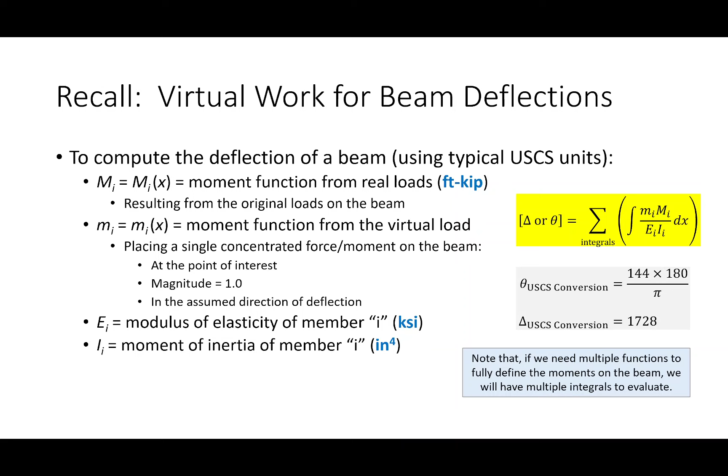But the story for frames is a little bit larger than this, and I want to have a more generalized discussion regarding the method of virtual work. So if we're talking about beams and in this case frames, so far we've only considered the deflections due to flexural effects. What I mean by that is we're only considering how the bending moments affect deformation. But it is possible that the axial loads affect deformation, and it's possible that the shears affect deformation, etc.

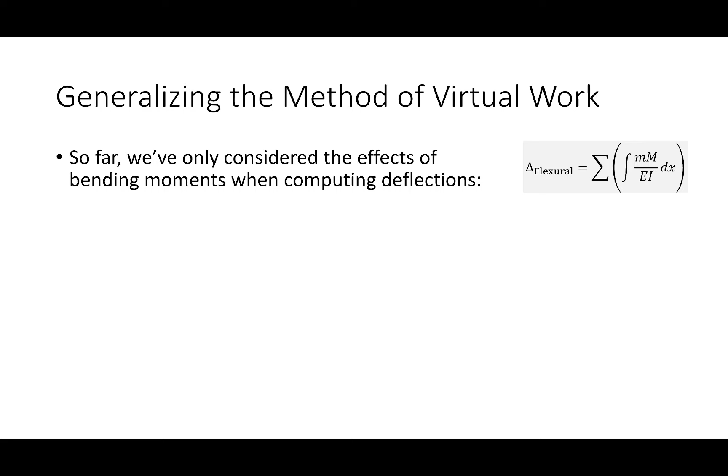And so if you wanted to generalize the expression of virtual work, really it would be this. I know this is kind of nuts here in terms of the size of the formula, but I'd like to sort of break down what we're seeing here. I want to be clear, everybody, I'm not going to expect everybody to do a problem like this in this course, but I just want to sort of take stock of what this is saying.

So let's say, for instance, that I have some sort of structural element in my hand, and I take that element and I stretch it, bend it, shear it, twist it, heat it up, etc. How do I compute the total deformation of point A from beginning to end?

Well, it's however much energy the element is storing in response to the axial loads, however much energy is storing in response to the flexural loads, however much is in response to torsional deformation, etc. If you look at these expressions, they should be pretty familiar.

For instance, remember in Engineering 216, if you had an element you were twisting, the angle of twist is TL over GJ, right? Well, I propose that if you wanted to find deflections using virtual work, just take a little virtual torsion, a real torsion over GJ, and integrate.

Same concept, same idea, I'm just expanding it. What I propose is that the more general expression of virtual work that you can apply to any structural system is this, and all you do is only consider the effects that are relevant to the system at hand.

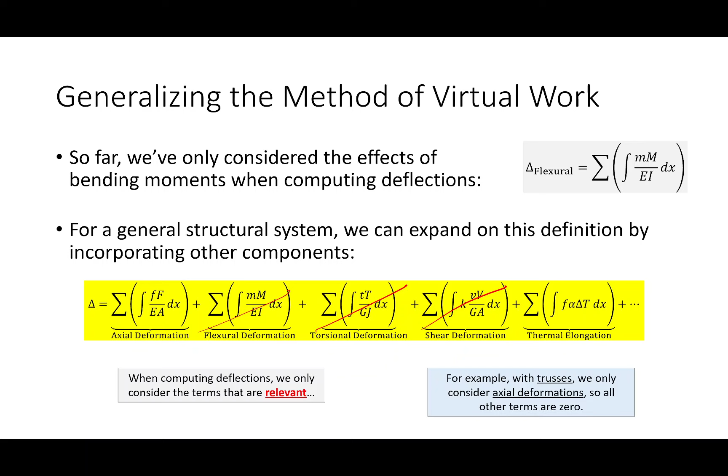We make those assumptions to state that axial forces are really all we need to deal with. We could talk about truss members getting longer or shorter, hotter or colder, but essentially we're able to disregard a lot of the potential impacts. So for trusses, we've only considered axial deformation.

So if we were talking about a frame, if we were looking at frame deflections, and really we could talk about this with beams as well, beams and frames could see bending moments, axial forces, and shears.

Now, for the sake of our discussion here and the problem we're about to do, I'm going to ignore shear deformations, but I'll talk about them a little bit later and where they'd be applicable. They're really not that hard to compute.

If you can write a virtual and real moment function, you can write a virtual and real shear function. If you can do this, you can do that. It's not any more difficult, but I want to have a more relevant discussion as to why you would consider shear deformations. We'll talk about that here in a bit.

Now, how do we do frame deflections? Well, it's the same idea. We do a real structural analysis, we do a virtual structural analysis, we put the load where we're interested in finding deflections, at the point of interest, in the assumed direction with a magnitude of 1, and write our functions.

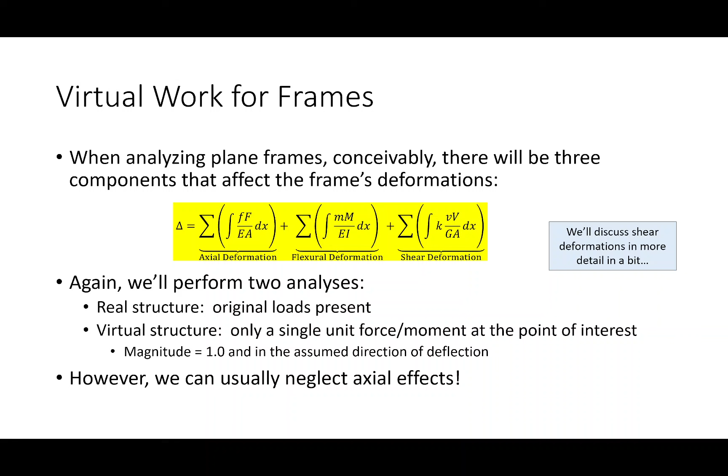Now, in the case of the frame we're about to do, we are going to consider axial deformation and flexural deformation. But I propose that for frames, you can neglect axial effects. I'm going to explain that with this example.

So this is going to be the main star of the show today. We're going to compute the deflection at point A, the vertical deflection, using virtual work. Now I'm giving you the real structure. We're going to consider flexural deformations, and we're going to consider axial and flexural deformations.

So for this problem, we're going to need big M, big F, little m, little f. We're going to need both for the entire problem. So we're going to sort of do both, but you're going to see something that happens as we get to the very end.

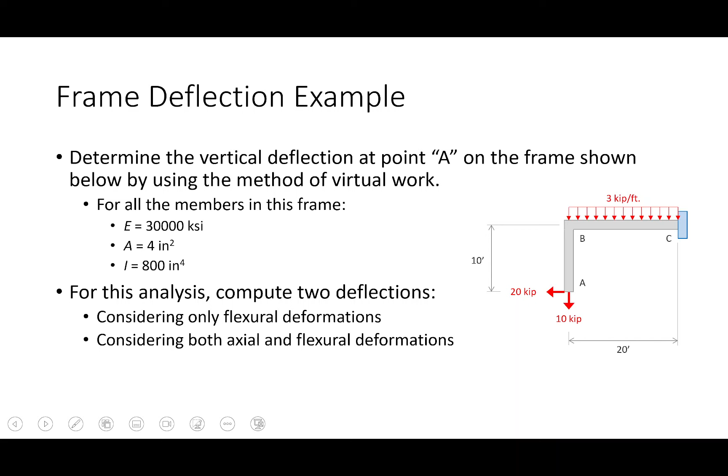Now, the one thing I do want to say about this problem is I want to discuss something I haven't really gone into, I've just sort of taken it at face value: these properties right here. So I'm giving you a Young's modulus of 30,000 KSI, an area of 4 square inches, and an I value of 800 inches to the 4th.

What I want to just say right at the onset before we do this problem is when it comes to the A value and the I value, the A is the cross-sectional area.

If I were to slice through the section, that's how many square inches of area there is. And the 800 inches to the 4th, that's the moment of inertia. Like if you remember from a rectangle, BH cubed over 12, remember that?

What I'll say about this cross-section is these values are a little bit unrealistic on purpose. For this area, this is a really, really big moment of inertia. What I'm saying is this frame, these members, are really flimsy axially. They have a really, really small area, okay?

And so think that through. If the area is really small, they should stretch a lot axially, like along their axis. They should be like a rubber band, like taffy, okay? But when we see how the numbers play out, you'll get what I'm talking about, and how in most frame problems we can neglect axial deformations. The best way of explaining it is to just do the problem, okay?

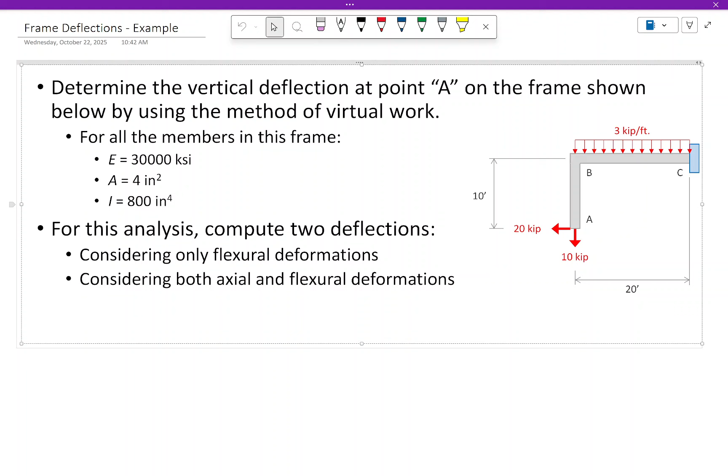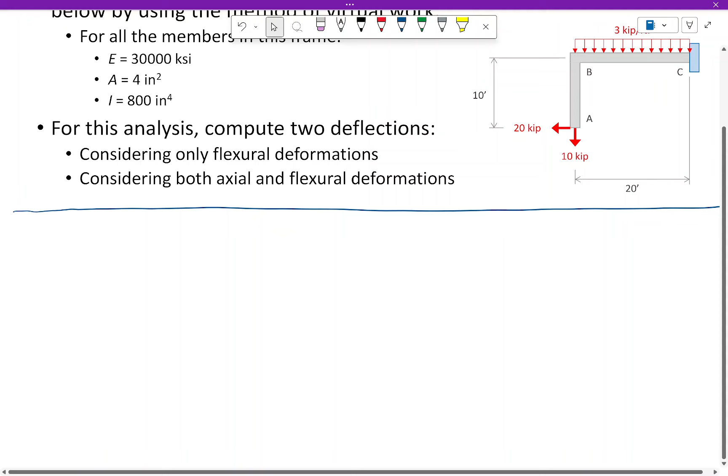All right, so, okay. So here's the structure. What I'm going to do is redraw this structure, and I'm going to do it on two sides.

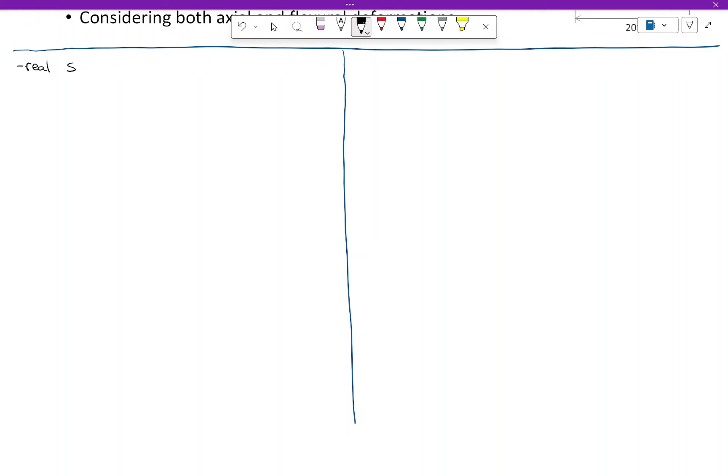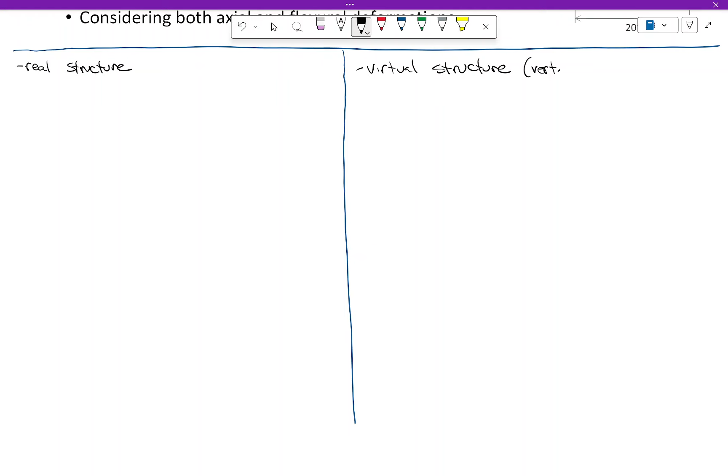So we're only going to do a vertical deflection. So the real structure and the virtual structure. So the real structure and the virtual structure, right? The real structure is going to look like this.

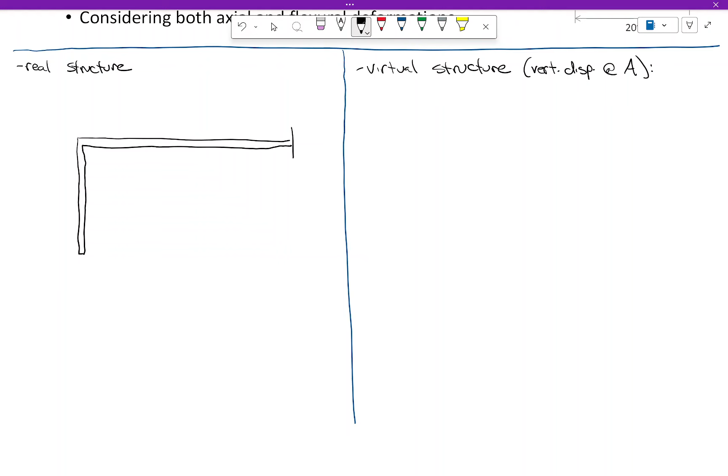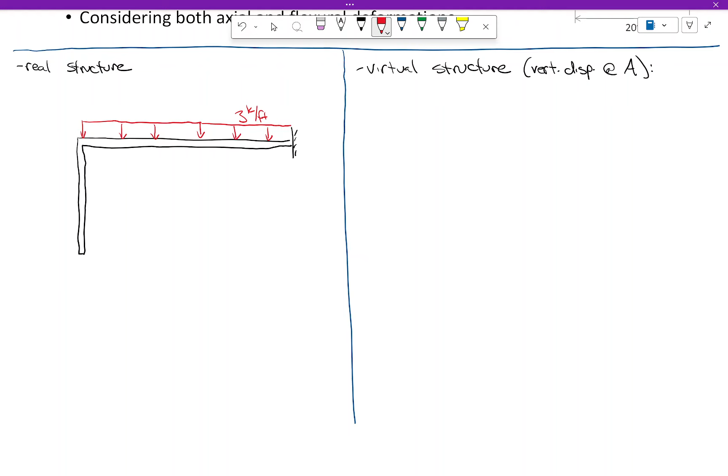Okay, we have a distributed load of 3 kips per foot. We were given a horizontal load of 20 kips, a vertical load of 10 kips.

Okay, let me ask you a question. Would you trust me if I just told you what the reactions are at this fixed support? Would you believe me if I said that the vertical reaction was 70 kips, the horizontal reaction was 20 kips, and the moment reaction was 600 foot kips? And by the way, in terms of dimensions, this is 10 foot, this is 20 foot. Let me label this. This is A, B, C.

Okay, would you all agree with that? Is that okay? You've got 20 to the left, so you've got to have 20 right. You've got 10 down, 3 times 20 is 60 down, so 70 down, you've got to have 70 up, etc. Is that okay? Okay, that's the real structure.

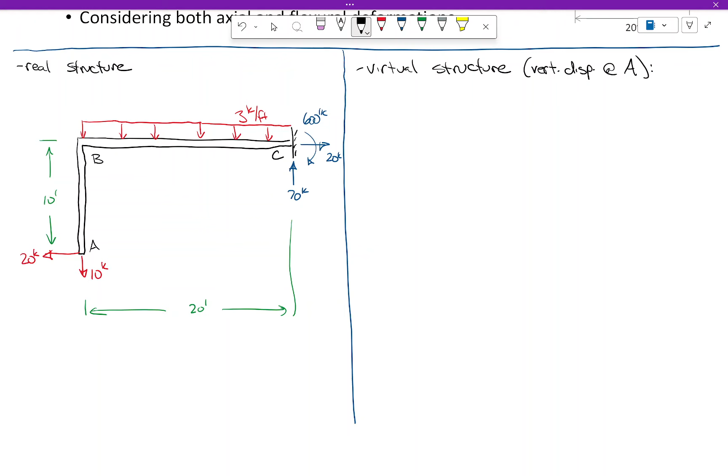The virtual structure is going to look like this. It's going to be very much the same frame, well, exactly the same frame, just no loads present on it. I've got a virtual load. I'm going to assume it deflects downward. I think that kind of makes sense, that it's going to go downward. This is A, B, C, 10 foot.

Actually, let me put that down here. All right, and then for my reactions: 1, and this is a moment reaction, and it ends up being 20, well, 20 foot, if we're being precise. So these are the two structures I'm going to have to analyze, the real structure over here, the virtual structure over here. Is everybody okay with that?

Okay, now here's what I'm going to do. I have two members, member AB and member BC, okay? So what I'm going to do is define a coordinate system for member AB. We'll call this X1, Y1. So in other words, the X-axis along the member, the Y-axis like that. So if I do that, I'm going to put the same coordinate system over here.

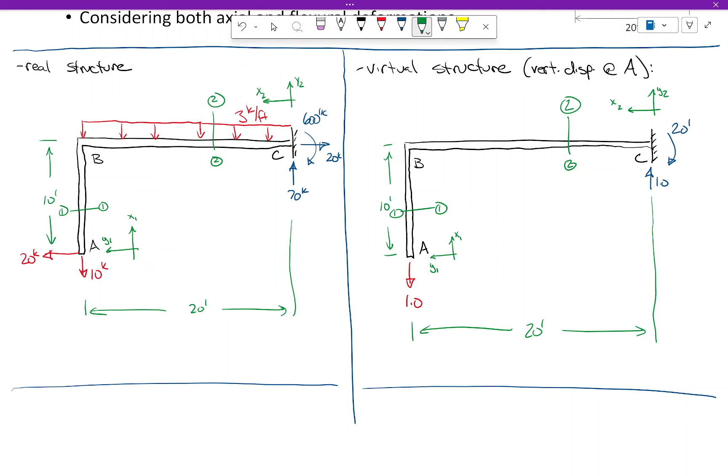So if I look at section 1-1 looking down, what do I have? I just have this. Section 2-2 looking to the right, I just have that. So let's see what they look like.

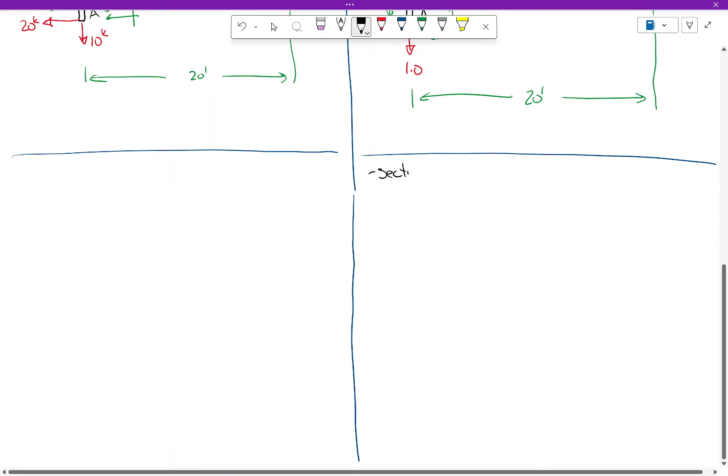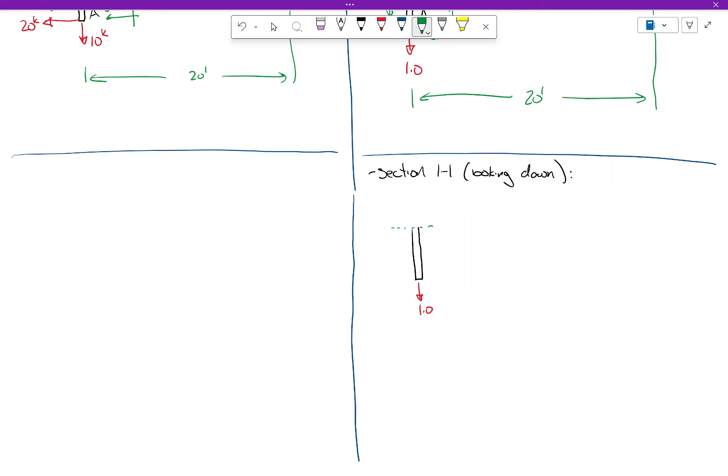Okay, so section 1-1 looking down is going to be like this. It's going to be like that. I've got 1.0 going down. I cut a section at some arbitrary distance, which we'll call x1. Okay, and so this is point A.

What are the unknowns here? Do I have any unknown horizontal forces right here? Like if I sum forces in the x direction, what's the horizontal force right here? Zero, right? I do have a vertical force.

I am going to have that. How much is the vertical force going to be? How much is that going to be? One. Okay, so we'll put that here.

How much is the moment going to be? How much moment is present in this member? It's not a trick question, by the way. If I have a member and I'm yanking on it, is there any moment present? No, so the moment is zero.

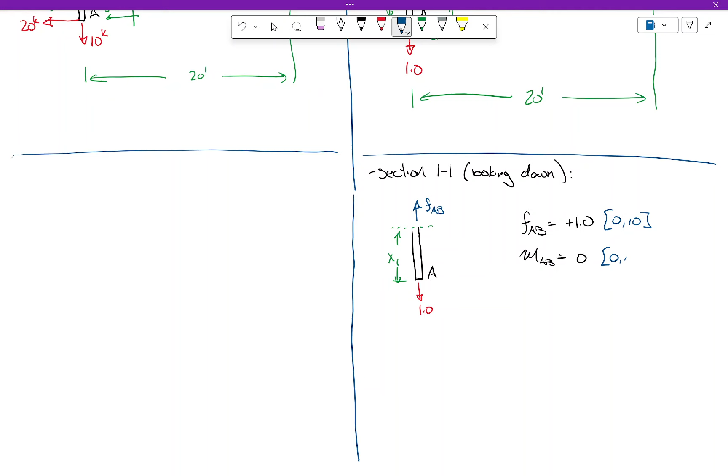So what I'll say is FAB is 1, MAB is 0. Those are from 0 to 10. Does everybody see why they're from 0 to 10? Everybody understand that? Because the member's 10 foot long?

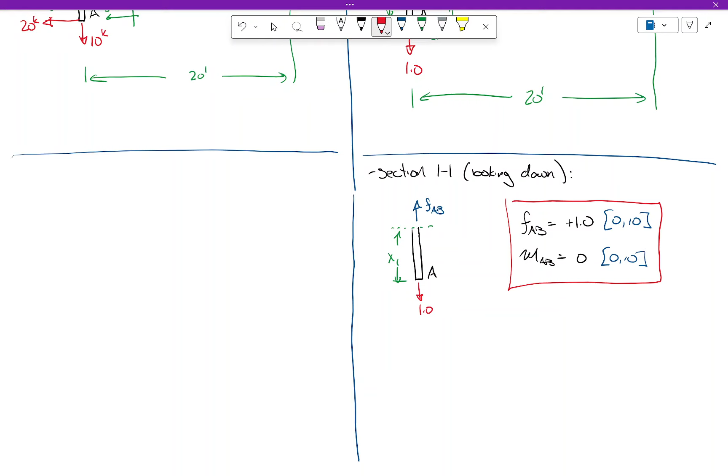So far, so good? All right. So let's see if we can come up with something similar. Okay, so FAB, MAB for the real structure. Let's do the real structure.

Okay, so what does the real structure look like if I cut a section and look down? I really came close to using the Expo marker on my surface just now. I really almost did. That would have been funny. Well, in retrospect, right now it would have been a little frustrating. Okay, so here's the structure.

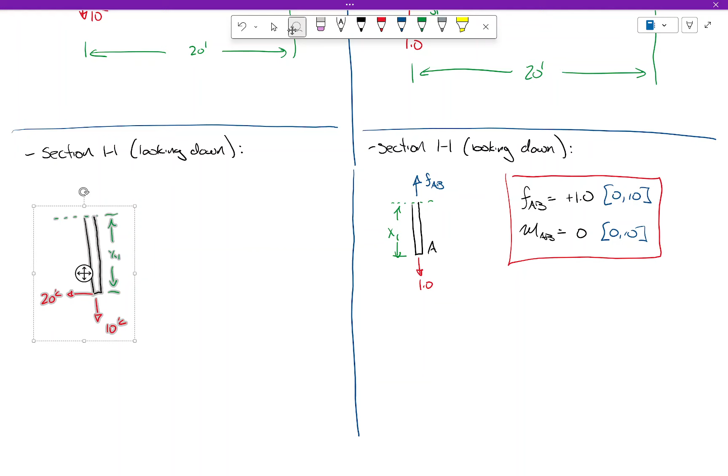I have 20 kips, 10 kips. This is X1. So what I need is an FAB and an MAB.

Let's reason through this. Let's start off with FAB. How much is FAB? How much is the axial force along the force of the member? Is the member experiencing tension or compression? Tension. And how much? 10 kips. Okay, so this is plus 10 from 0 to 10.

So in other words, there is this. Now, I propose there is a moment present. So we'll call this plus 10 for the axial force. Does anybody know how much the moment is?

20x1. That is correct. That is not what I'm going to write down. What I'm going to write down is from 0 to 10. Why am I doing that?

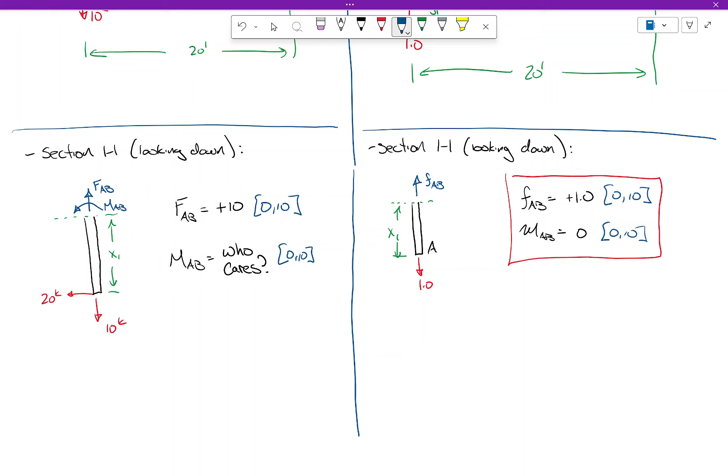Have you ever had an engineering professor write a formula that says, who cares? Well, there you go. First time for everything, right?

Does it make sense why I did the virtual structure first? Because recognizing that this is 0 meant I didn't have to do this work. This seemed like an easier structure to deal with first, so I said let's go ahead and do this first. One thing you might notice on your homework due at midnight is that there are certain regions, on the virtual structure, where the moment is 0. So why take the effort to derive the real function, when you're ultimately multiplying it by 0? Does that make sense? Something to think about.

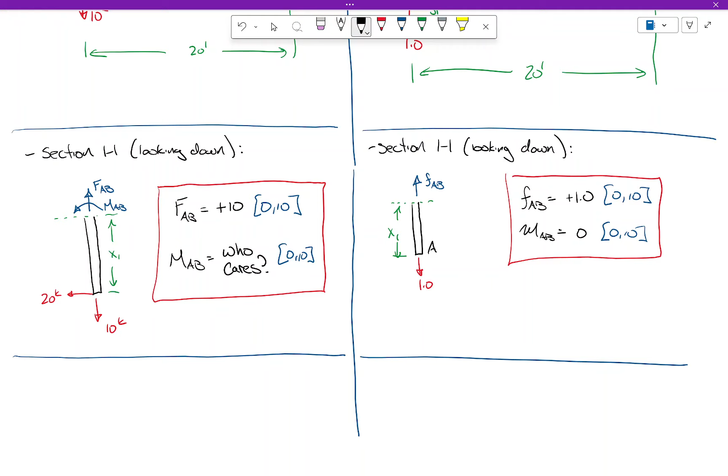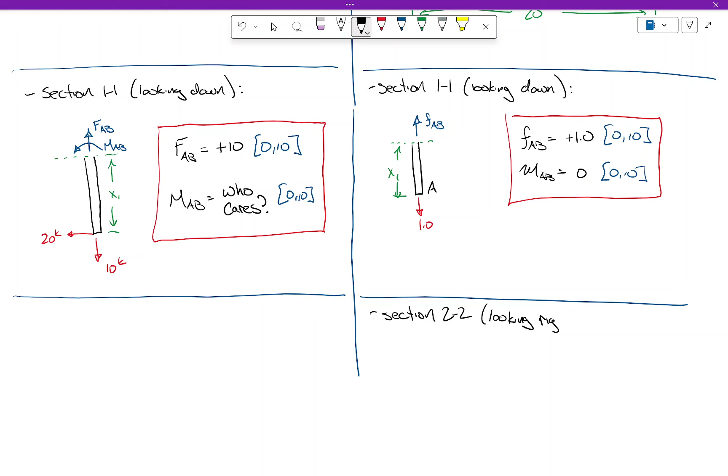Okay, let's do section 2-2, and I'm going to do the virtual structure first. Now I'm going to look to the right. Let's just refresh: what does the virtual structure look like? If I'm cutting a section and looking this way, I'm going to see this force and that moment.

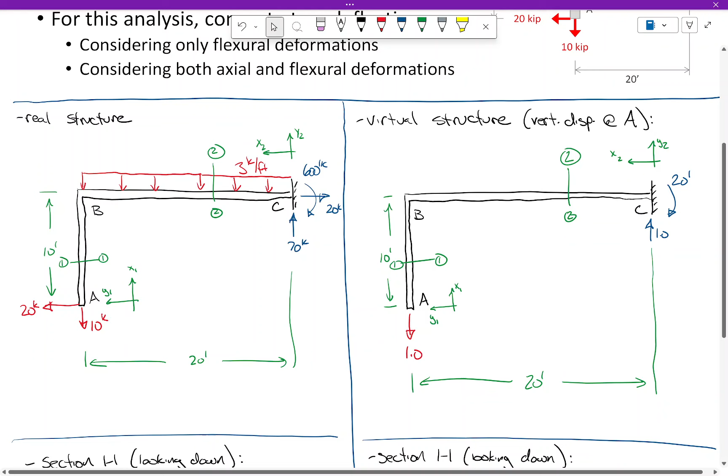Let me have a little reference here on the board. I'm going to have FBC equals something, MBC equals something, and they're going to be valid from 0 to 20. Let's see if I can fill that in.

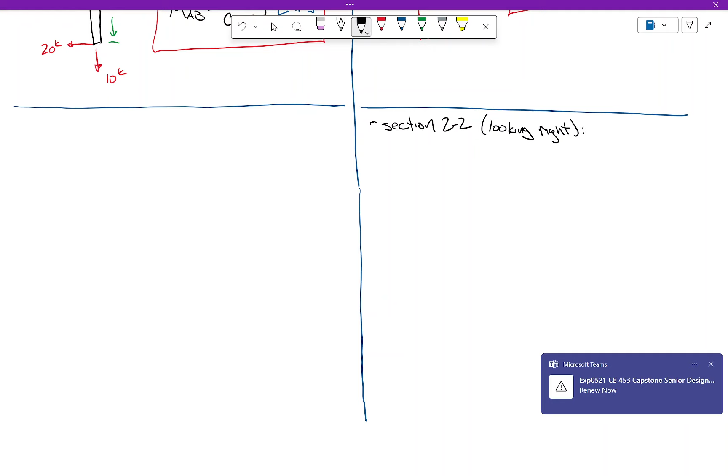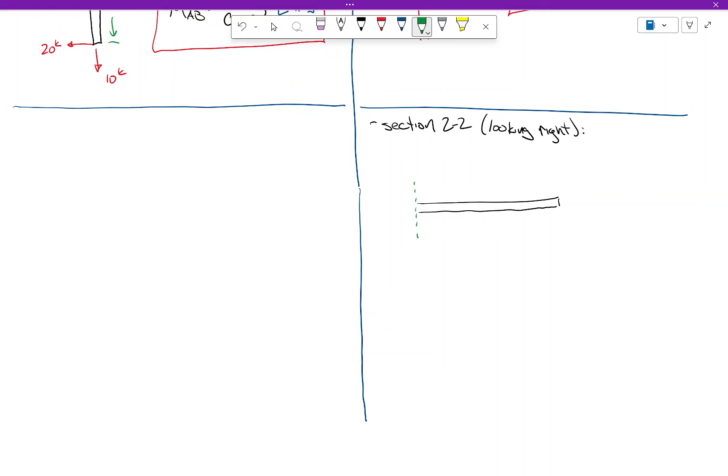So we've got my structure like this. Here's my section cut right there. I have a reaction of 10, a moment of 20 feet. This is point C. This distance, we're going to call X, or X2 in this case.

Let's start off with unknowns. Is there any unknown in the X direction? There's no unknowns in the X direction. So what is FBC? Along the axis - remember, little f is along the axis of the member. This is the stretching force, either stretching or squishing along the axis. This is going to be 0.

Does that make sense? So before we do anything, what can you tell me about over here? What's going to happen over here? Doesn't matter - FBC doesn't matter. We already know, we don't have to worry about that. We do need to get an MBC, though, for both sides. We are going to need to do that, and that's going to take a little bit of work.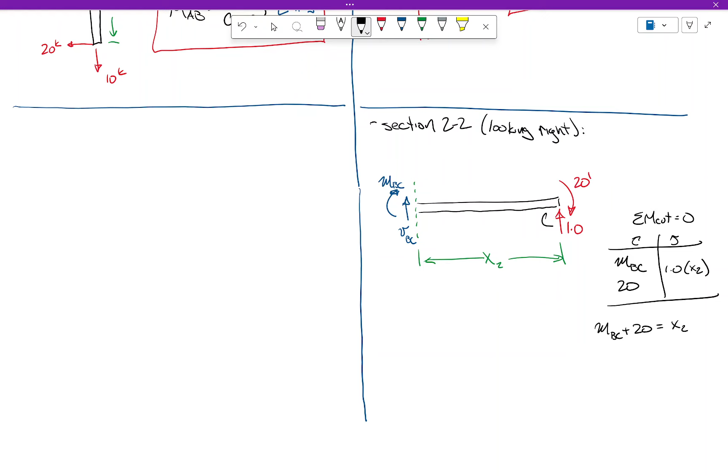I'm going to have MBC going like that, 20 going like that, 1 times X2 going like that. Is that okay? Does that make sense?

Yes, I have a question about the little VBC - why is that not, like, 1 going down? So, oh, you're talking about this. Okay, that's a great question, let's talk about that.

Okay, so if you cut a section in general here, and look to the left, this is positive shear, this is positive moment. If you cut a section and look to the right, positive shear, positive moment. So to answer your question, here's what I would say: if we were summing forces in the y direction, that is negative - it is going down, right? But when you're deriving expressions for shear and moment, you automatically use this sign convention: if you cut a section, look that way.

So we're cutting a section looking to the right, up and over. If we were summing forces in the y direction, we would get VBC equals minus 1.0, and we would get that. Does that make sense?

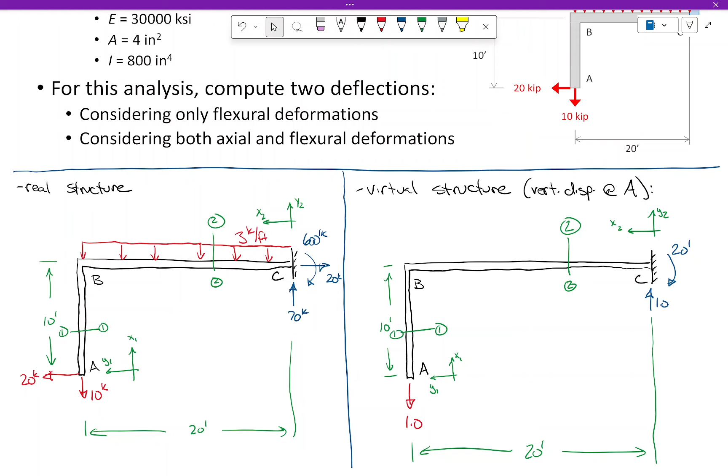Does anybody notice how this fails the derivative test? If I take the derivative of this, what do I get? I get 1, right? But this is minus 1. Why is the sign flipped? The reason the sign's flipped is because the axis is going that way. The axis is flipped, so the sign's going to be off. So that was good stuff.

So this is x2 minus 20. How do you do 0 to 20? Oh, yes, you're right. Thank you. Zero to 20, yes that's right. 0 to 20, 0 to 20. Everybody with me on this?

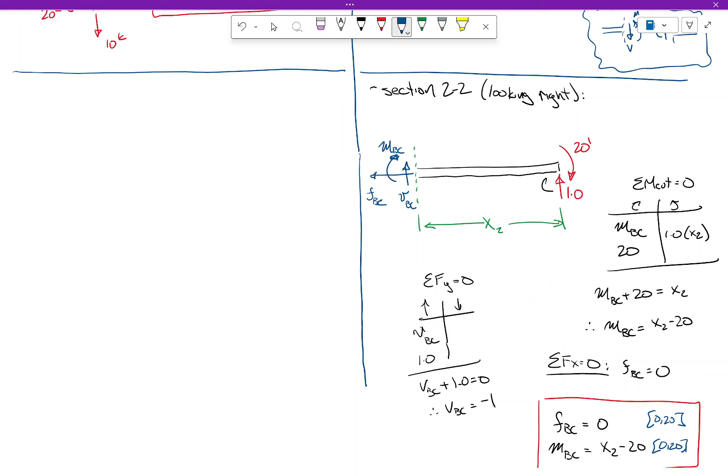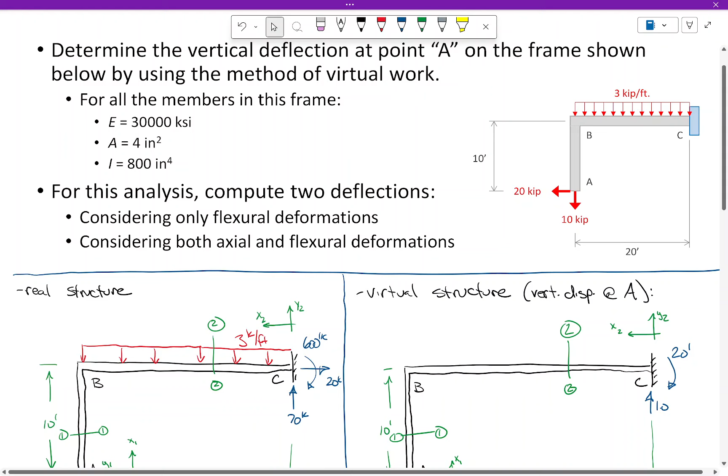All right, so the only thing we have left to do is section 2-2 on the real structure. A little bit more going on with this one. Because we've got to account for all this, we cut a section looking to the right. We have all this we have to deal with. So just a little bit more.

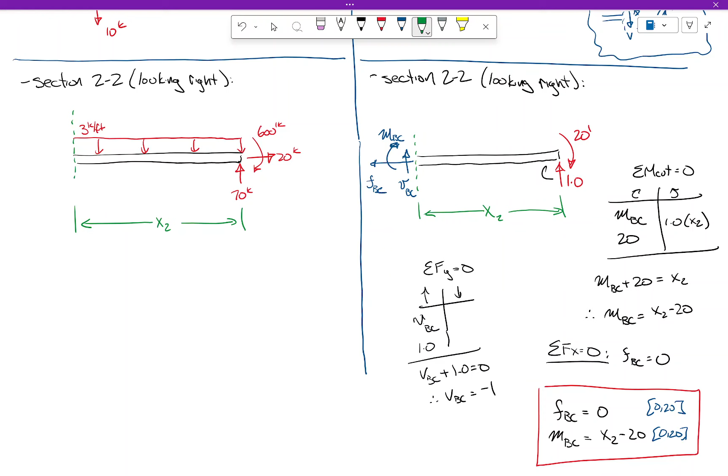So we have a 70 kip, we have a 20 kip, 600-foot kip, 3 kip per foot load. There's the section. X2. So what are my unknowns there at the end? I'm going to have an F, an axial force, an unknown shear, and a moment. Now we've already decided that FBC we don't care about because we're ultimately multiplying it times 0. Does that make sense? Everybody okay with that?

So what do we do with all this? Well, what we do is we collapse this into a point load, moment arm right here, and then we sum moments at the cut. When we sum moments at the cut, I don't need to consider that and that because they're going right through it. I'm going to have an MBC on this side, 3x times x over 2, and I've got to deal with that 600. And that's going to be opposed by the 70 on that side. Unfortunately, this equation is just going to be a little messy, not really anything I can do about it. So MBC plus 1.5x squared plus 600 equals 70x2.

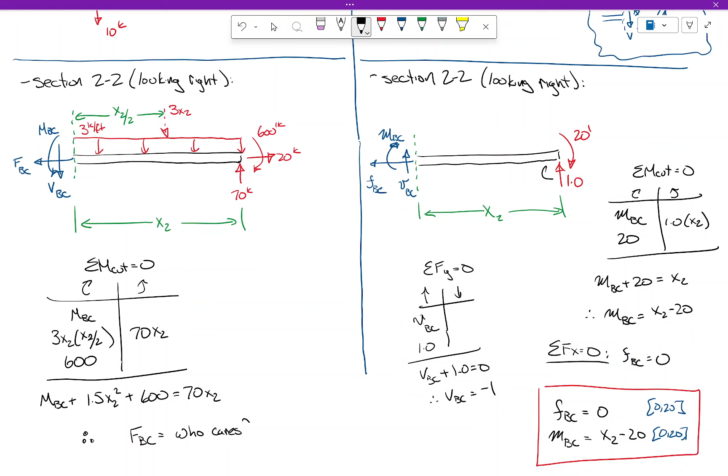So therefore, what do we have? We have FBC is who cares? And we have MBC is 70x2 minus 1.5x2 squared minus 600. Both of these from 0 to 20.

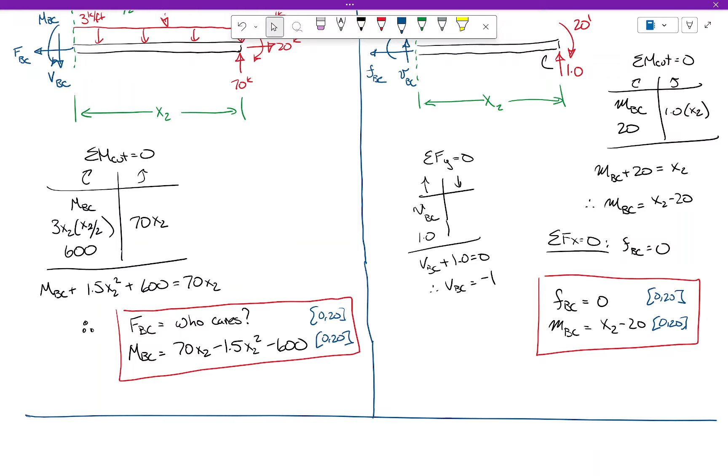Yes, sorry, why is it my moments are flipped? Is it because of the axis? For MBC, I have it on the other side of the table. Oh, that's because I made a boo-boo. That's my fault. I needed to draw it like that. I made a boo-boo, that was a whoopsie. It needed to be drawn up, that's the positive sign convention. It needed to match. Well, would the point load moment be opposing the 600? It is, that's why I have the 600 this side, the 70 this side. Oh, never mind, okay, yep. Yeah, that error, that's my fault.

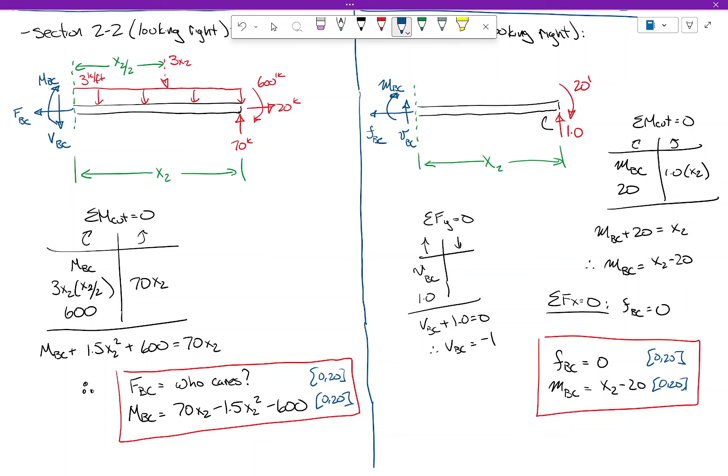Does that make sense? Yes, why can't we just look left for that one? So if we looked left, we would have to consider all of this. We can, no reason not to, we would just have to consider all that. We can't just say there's nothing going on here. There is. It's a great question, but it's an easy mistake to make because there's nothing going on inside the joint right here. Good question, sound good?

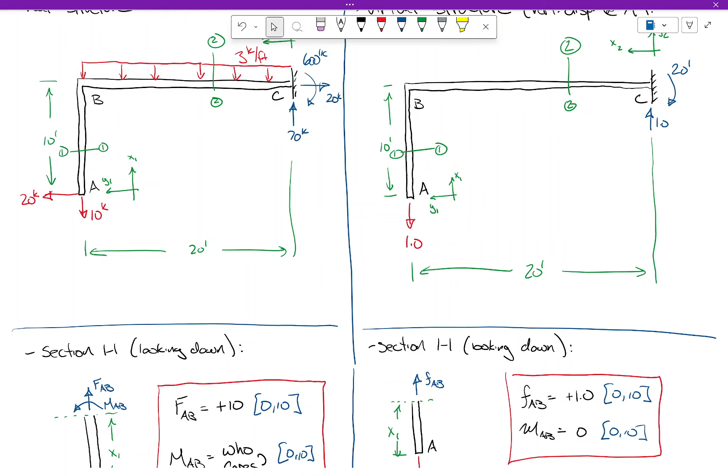All right, once you get to this point, the problem should be pretty easy, and let me show you what I mean. And this is really where axial deformations can be ignored. So let's start off with this, let's just recall

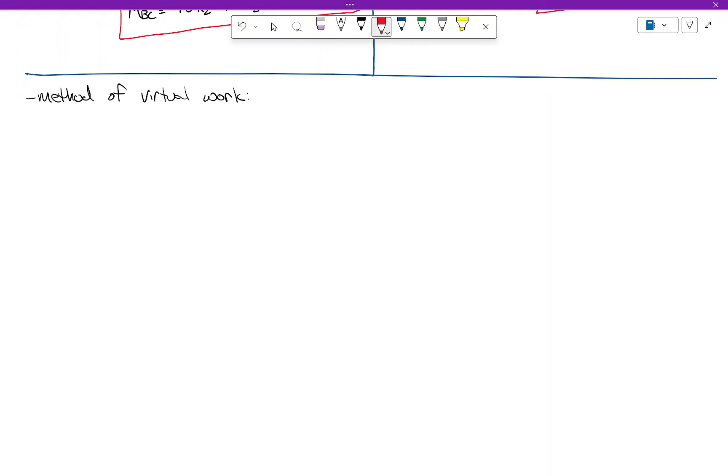Those are our properties for this problem, right? It's 30,000, 4, and 800. So the way that I'm going to organize this is I'm going to do the flexural deformations first, then the axial deformations.

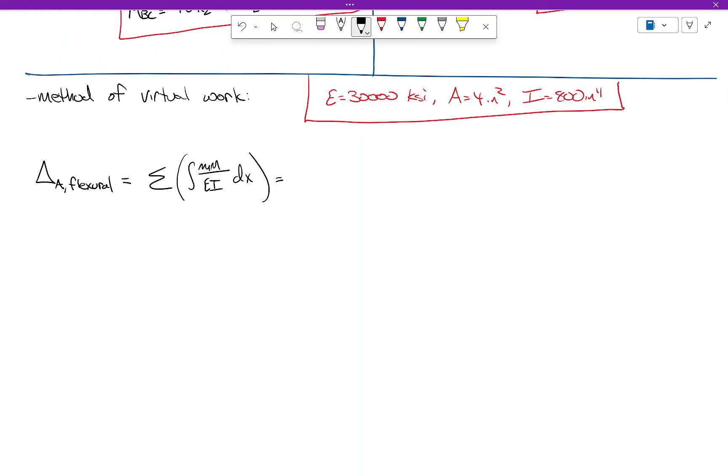So the flexural deformations are going to be summing up these integrals. We're going to be summing up these. Now, how many of them are we going to have? We're going to have technically 2 of them, but so how do we handle that? Well, the first thing I'm going to do is the E and I is constant for the whole thing, and this is a deflection. So I'm going to say 1728 over EI times some integrals. And what are those integrals?

We're going to have an integral from 0 to 10 of this, plus an integral from 0 to 20 of this. But by the way, what can we do with the first integral? Goes to 0 because that's what we've got. And we know that one's 0, so we don't even have to worry about it. So all we have is 1728 over EI times an integral from 0 to 20 of x minus 20, and 70x minus 1.5 x squared minus 600 dx2.

So let's just sort of digest what's going on here. This is just a regular old calculus problem at this point, right? This is something you can plug into your Casio FX115ES Plus, integrate from 0 to 20, or break out the old Wolfram Alpha. I know college students use that every now and then. So integrate from 0 to 20, multiply by 1728, divide by EI. Are you okay if I just told you what the number was when you do that? Okay, so when you do that, you get plus 3.36. So therefore, if we calculated the deflection at A and all we used were the moments, we would get 3.36 inches down. Does that make sense?

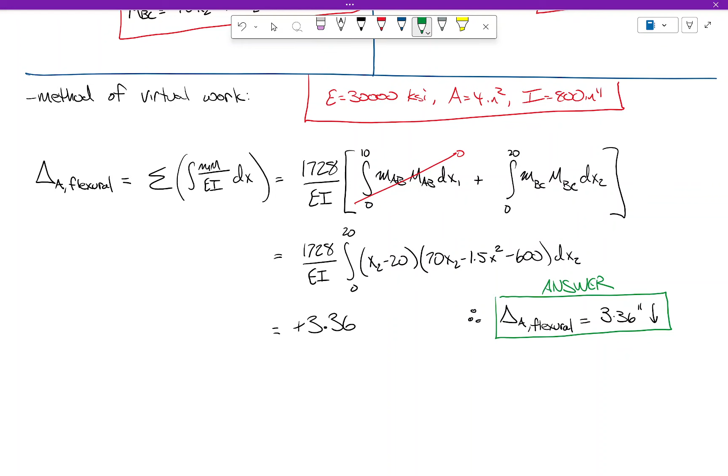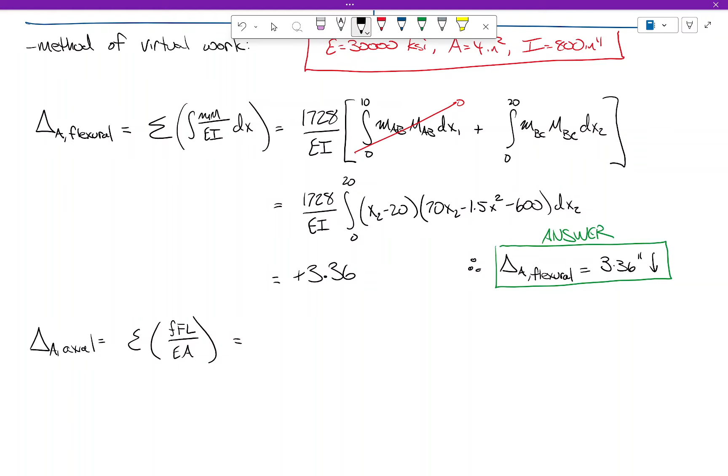How are we doing on that? Okay. Now, for the axial deformations, what I'm going to do is do a truss problem. Remember how we calculate deflections using for trusses? Little f, big F, L over EA. Remember that? So what do we got? We've got little f, AB. Here, let's do it like this. The 1 over EA, that's consistent. So we have little f, big F, L, plus little f, big F, L.

But does anybody see something that's going to cancel, or get eliminated? The second one, right? That's going to be 0. So all we've got is, which is, I mean, what do we have? We have 1.0, 10 kips. Remember, AB is 10 feet long, 30,000, and then 4 square inches. Remind me, when we calculated truss deflections, what did we have to do to the member lengths? We had to convert them to inches, right? Y'all remember that when we did virtual work for trusses? We had to take the truss lengths and convert them to inches. So we got to throw a 12 in there. What do we get when we calculate this? We get a value of 0.01.

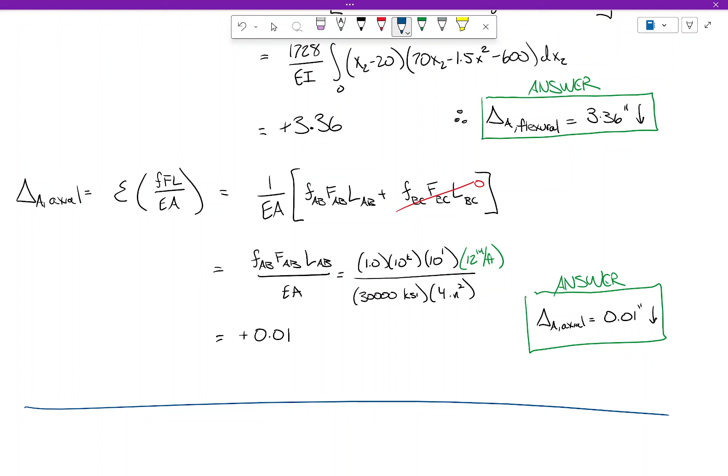So therefore, we get a really, really small deformation. Think about this. If we were to ignore the axial forces, we would say that the deflection is 3.36 inches. But if we consider the axial forces, it's 3.37. That's like the same deflection. We're talking about structural deformations in buildings and bridges, the percent difference between those calculations is relatively minimal. So what I am saying is that for frame deformations, you can ignore axial. You can ignore it. That's what I'm saying. Does that make sense? And keep in mind, I said at the beginning, this was a member that was very flimsy axially. Very flimsy axially. Really small area, really big moment of inertia, and it's still barely stretching. Frames just are very stiff axially. They just are. Does that make sense?

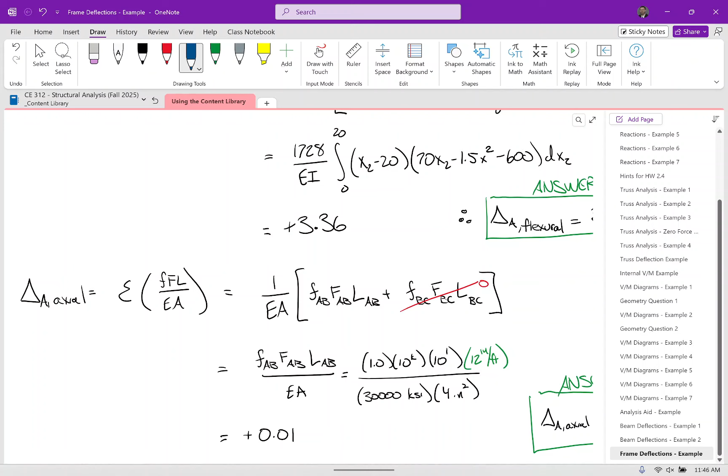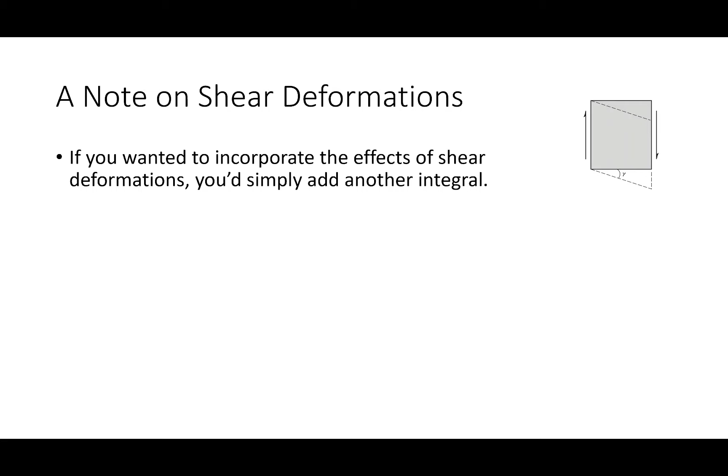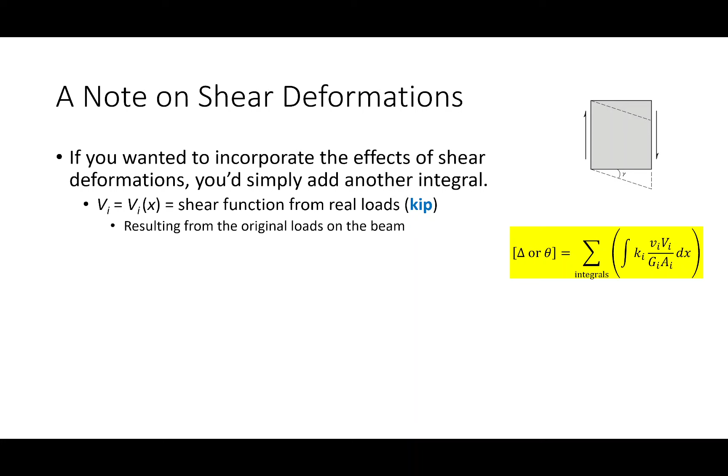All right, I would like to make a quick note about shear deformations, because remember how I said we could get a shear function, but we didn't use it? Well, let's talk about that. So shear deformations happen when you're considering the effects of the shear forces on the deformation of the structure. So if a flexural deformation is like that classical bending shape, shear is just that, like a change in angle along the beam. And a lot of times we neglect them. In most routine structural analyses, we can neglect shear deformations. Now, first off, if you wanted to include them, it's very easy. All you have to do is another virtual work computation. So instead of little m, big M, it's little v, big V. You're going to have a big V shear function and a little v shear function, the same idea.

Instead of using the elastic modulus, you use the shear modulus. It's just another lookup value for a given material, and you use the cross-sectional area. Now, when you do the virtual work formulation for shear, there end up being a lot more cross-sectional terms that show up in your integral.

What we do is we lump that into a new section property, which we call K. But K is a lookup. So, for example, if you had a beam that was a rectangular cross-section, then K is 1.2. If it was a circular cross-section, it's 10/9. You can look them up. It's pretty straightforward.

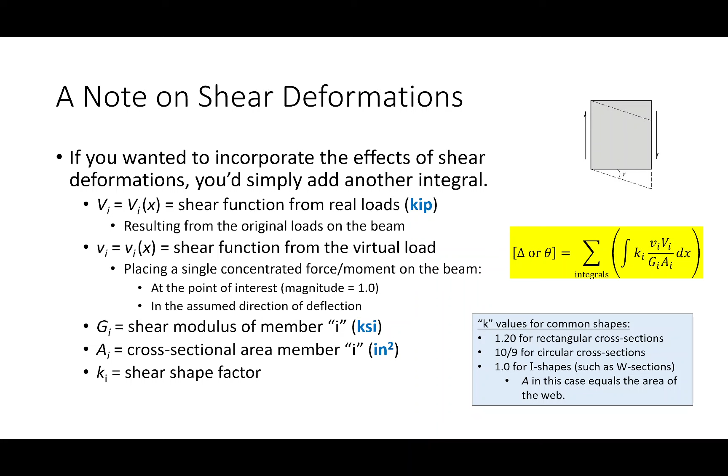Now that's how to do it. The big question is, when do shear deformations matter? More often than not, in building systems and bridge systems, we're trying to use flexural elements that are as slender as possible. A lot of times, when I say slender, here's what I mean. So if I have a beam like this, here's a beam.

I'm talking about the ratio between this and this. So when I'm talking about beam slenderness, essentially what I'm talking about is the L/D ratio. More often than not, beams in buildings are fairly slender. Like the beams in this building are probably having an L/D of like 25 to 30, something like that. In most applications, an L/D of 25 or 30 is about what you're going to see.

But there are some instances where you see a really, really deep beam. That's when shear deformations start to matter - when the beams get deep. So some examples of deep beams would be, for example, in a bridge, if you have a hammerhead pier. This is a really short cantilevered beam that is subjected to a lot of shear. So that section is really deep compared to how long it is. That's an example of a deep beam.

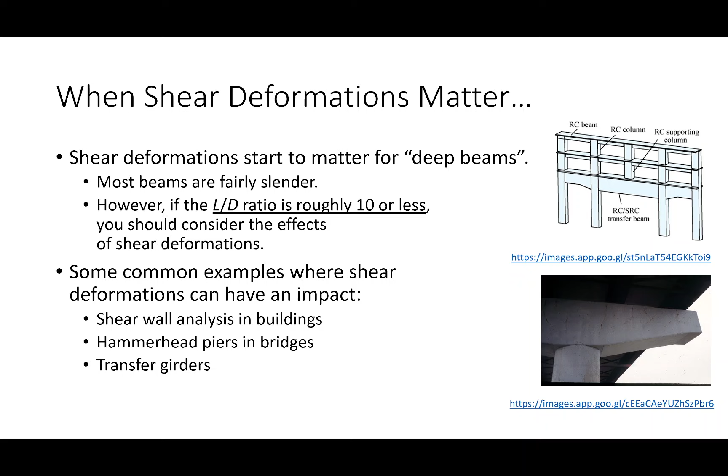To explain how this can happen, I want to walk you through a really brief example. Let's say you have a simply supported beam with a uniformly distributed load. The beam is 25 feet long with 3 kips per foot. It's made out of steel, so this is the Young's modulus for steel, this is the shear modulus for steel. They're just lookups for the cross section.

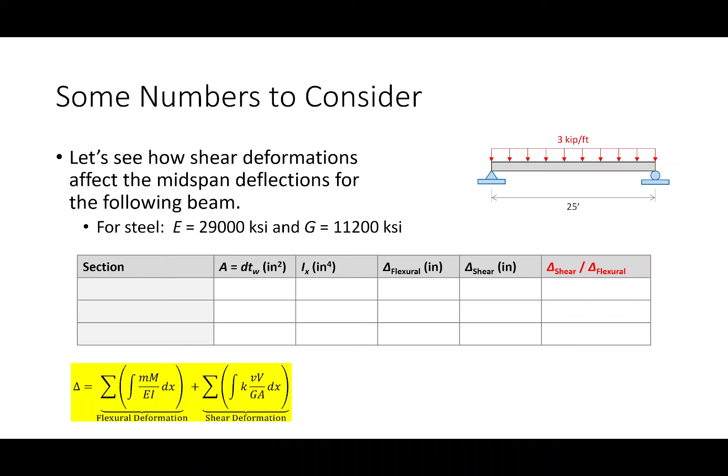Let's say I start changing the shape that I use. So again, we're going to use this expression. You can derive moment functions and shear functions - here they are. All right, so if I use a W14 by 26, that means it's about 14 inches deep, so the L/D is about 21 or so. Here's the area, here's the moment of inertia.

If you go through and calculate the flexural deformation, you get that. And you calculate the shear deformation, you get like that. So it's a really small value - only about a 1.9% difference. So for a relatively slender beam, you can kind of ignore your shear deformations.

But what happens when the beam starts to get deeper? I'll skip to the end. What happens if you have a W36 by 135? This is a really deep beam compared to the span. Now I'm making the beam bigger, right? So if you look at the deformations, they are getting smaller. But if you compare the two, you're getting about a 10% error.

So if you ignore the shear deformations, that's fine if the beam is slender. But if it's deep, you're going to have error in your calculations - an error between what you're calculating versus what is actually happening in the real world. The rough idea is if your L over D is less than 10, you need to include shear deformations. That's when it really starts to matter in most applications.